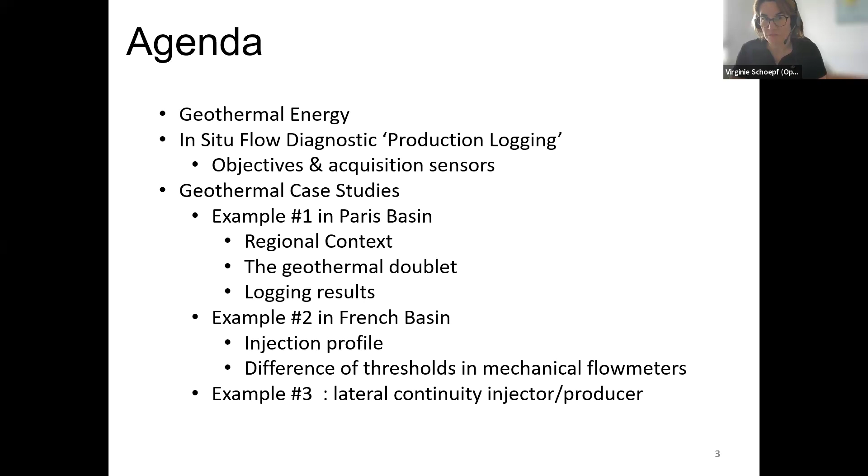So today we're going to start first putting in context this production logging. And I'd like also to present you the instrument we are using before we deep dive into the case study. So there are 3 different places and they are all in France. So let's put this case study in context. They are based on geothermal wells that are deep wells. So there are different types of geothermal energy. There is the shallow one that is limited to 200 or 500 meters. That depends on the local legislation. That's an illustration from EGEC, by the way, the European Geothermal Energy Council.

And then below 500 meters, we go into deep geothermal. And I would say there are 2 types. One that goes to moderate depths, 5-6 kilometers, down to 200 degrees C. That's a geothermal that is mostly used for heating and cooling, and we have examples from this type of geothermy, but there is also very deep geothermal. I think you had already different talks in this special interest group that go deeper. So today, the tools we are going to use are tools that are used in hydrocarbon wells also, but with the common spec of 150 degrees C max and 1034 bars.

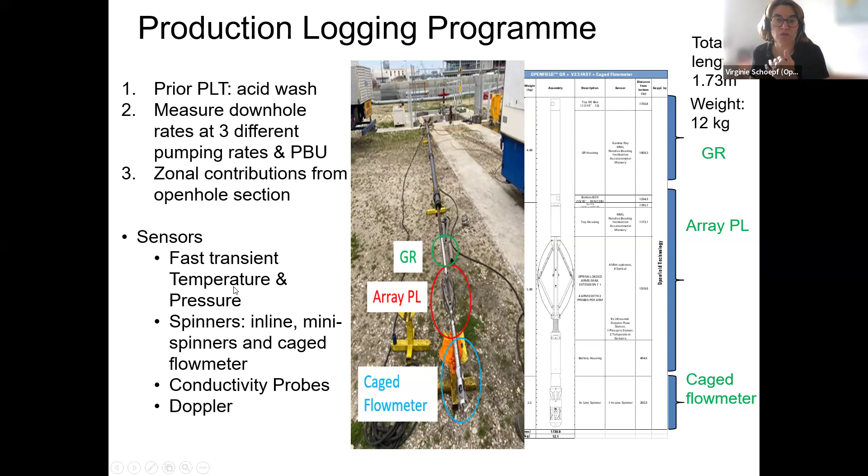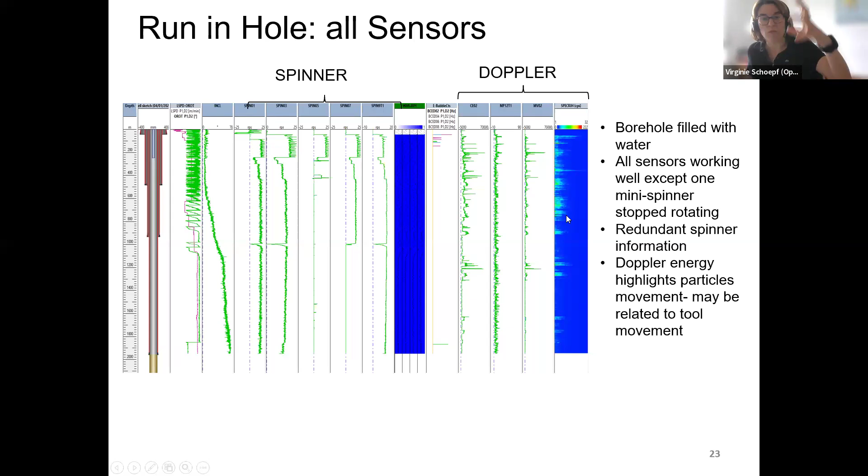Also looking at the run in hole of the conductivity data. So I mentioned that we have a conductivity probe. This probe is not calibrated to salinity compared to some of the ones, I think, that exist in the industry. For us, in Openfield, we were using this probe to really recognize water versus hydrocarbon. But if in low salinity range, we know that this probe is going to be sensitive to salinity.

So what we have here again is the depth, pressure, apparent density, close to 1 gram per cc. And then we have this conductivity probe data here, that's the raw apparent conductivity, that is very low, because we have air just below the wellhead, and then increases, then we are going to water, and we see there is a slope on this curve. And why do we have this slope? Actually, it could be maybe because we have a gradient of salinity, or because temperature is increasing.

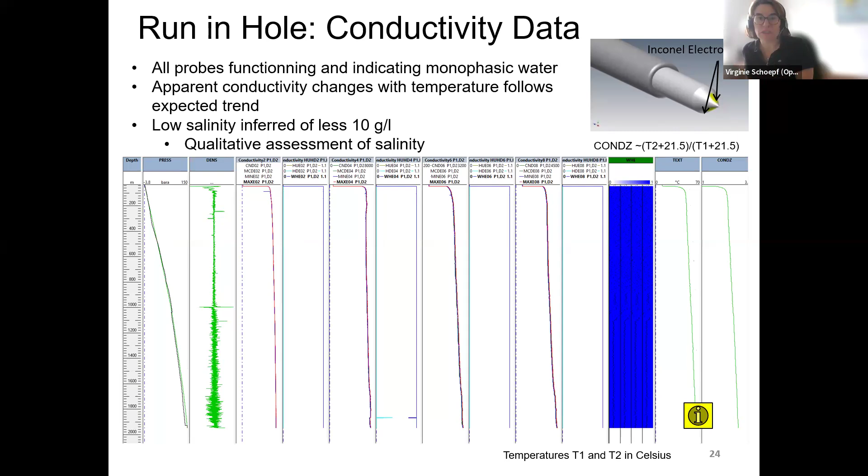So we can check that if we emulate a conductivity increase just based on the temperature, we can see that the response is very much alike the measured response. So we know that there's no gradient of salinity here. It's purely an increase of apparent conductivity because of temperature increase. What we know also from our sensor is that the fact that we can still see an increase, it is not saturated, so we know that the salinity is less than 10 grams per liter. So of course, at surface, the water is produced and analyzed, and that was confirmed.

I mentioned that going up and down, there are generally 3 steps of rates that are done at different rates. So that was acquired. So we acquire pressure, temperature, all the spinner data. And we compare surface metering that was given to us with quite a large inaccuracy, 25%. And based on the data we got from the production logging tool sensors, so mostly propellers, this is inside casing, we are able to get more accurate than the surface metering. So it's more in a plus or minus 5%. So we are in good agreement with surface.

Another thing that they do at this stage, they shut in the well and they record the pressure buildup. Why do we do that? It's in order to understand the reservoir transmissivity, and that's quite key to characterize the subsurface environment.

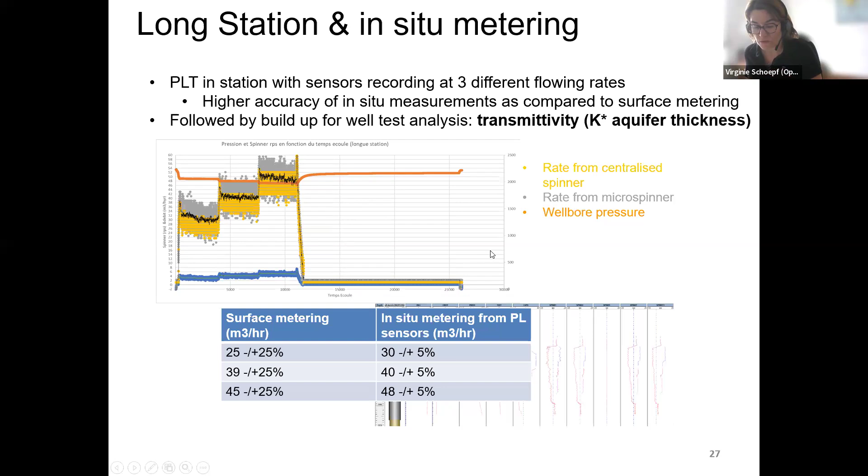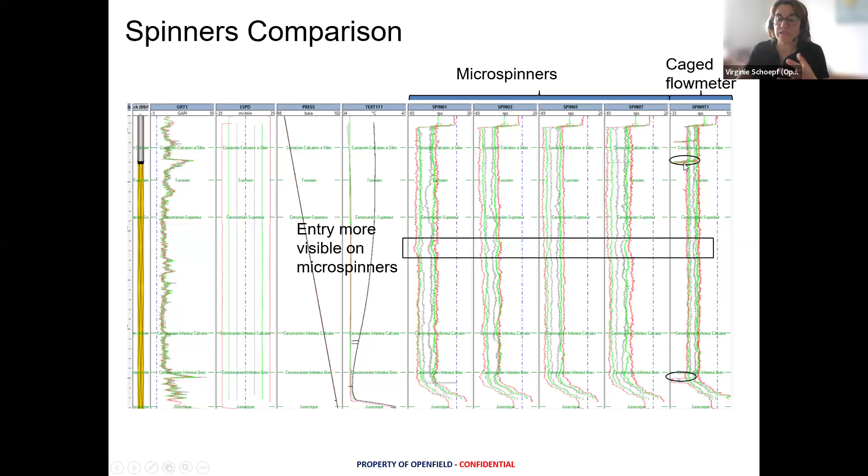Nevertheless, if we compare the mini spinners to the big helix, we can see that there are some inflows inside the limestone. That's the limestone part. That's quite important to have a sensitive flow meter, because it will be able to allocate that, to say that yes, there is some that is going into the limestone. We know that the biggest helix tends to average more; they are more inert than the small helix.

So when we look at that, we see it's quite, I don't know, 300, 400 meters, well, maybe 50 meters of sandstone. That's a vertical well, and we are drilling a lot, with most of the flow going to sandstone. So that can again trigger some questions on whether we should in the future do a deviated, longer part into the sandstone. Well, yes and no. Again, for the limestone, this is a profile just at the start. It may be better, may have more fluid going into the limestone, but there is also the fact that this well managed to get quite the objective in terms of rate.

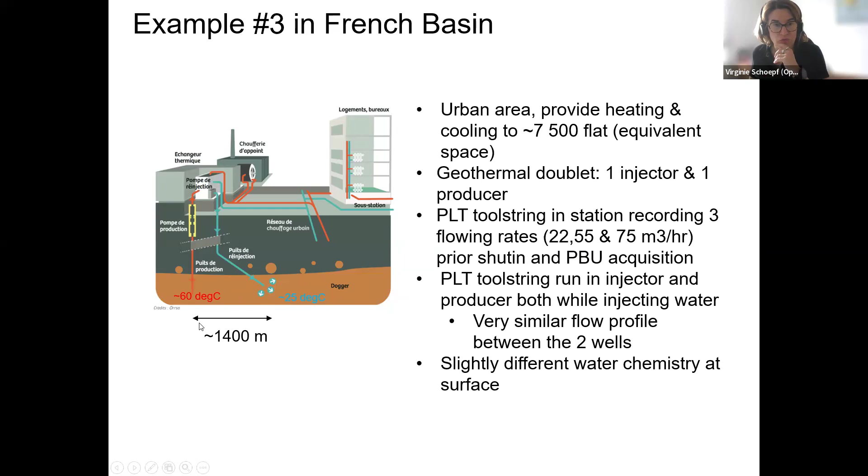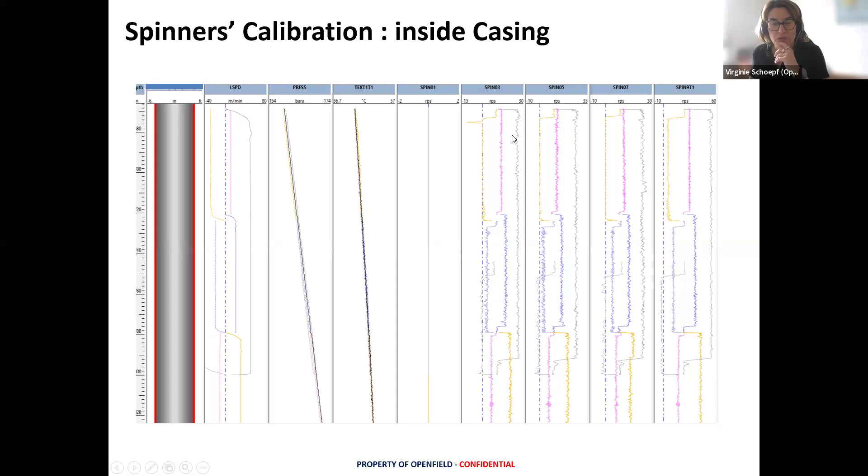First, again, just to show you a bit of spinner calibration. I didn't mention that, but how do we do spinner calibration? We acquire data at different cable speeds. LSPD is cable speed. So you move the tool at different speeds, and then you record the rotation per second of the different spinners. From that, one way is to do a cross plot of RPS, rotation per second, and cable speed, and then you will get a slope if you are in stable condition, and that slope is going to be the conversion of RPS into flow speed. So we can do that for all the spinners. The mini spinners tend to have the same standard slope, and then the inline spinner, remember there is a bigger helix, also gives us a speed.

So what's interesting here, if we look at the type of flow, the flow rate was 75 cubic meters per hour, and inside the casing it's 8.6 inch. What we could see, we had very accurate velocities, good calibration plots, and several mini spinners which repeat a velocity around 30 meters per minute, whereas the spinner at the center, the biggest helix at the center, is reading higher.

So why is that? Well, if you use the flow rate and the ID of the pipe, you can see that you are actually in laminar flow. And in laminar flow, depending on where you are in the cross section, you will get different velocities. So the helix, the inline spinner, is at the center, so it's reading higher velocities than the mini spinners that are just less than 1 inch from the wall.

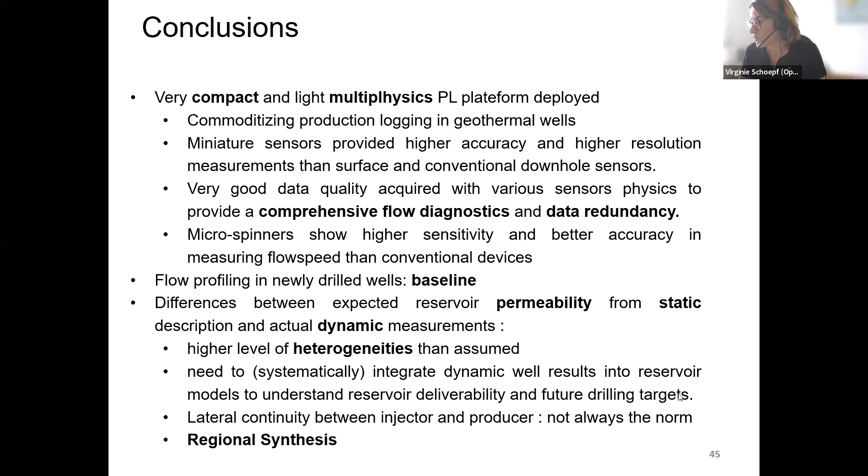So Ivan Virshlo says, is it true that the Rhine Graben geothermal gradient is 100 degrees per kilometer? Basically 200 degrees at 2 kilometers depth. Do you have any insight on that? It's 10 degrees per 100 meters. It's 100 degrees per kilometer. Is that what the question was? Okay. Yeah. But there are some areas with an even slightly higher gradient.

Maybe there are people from Germany or from Alsace in the call, ES, or Lithium de France, that are in the 100 degrees per kilometer, but they are even slightly higher sometimes. Yeah, we do see those, not just in Europe. Earlier we were talking about the projects in the United States, there are some areas where it's easy to find 100 degrees per kilometer.

Tuscany, Hawaii, California, Oregon, Yellowstone, Indonesia. There are lots. That's maybe something to think of for the future. We're going to have to design, as we talked about, tools that can handle super hot environments. That's something for the future.

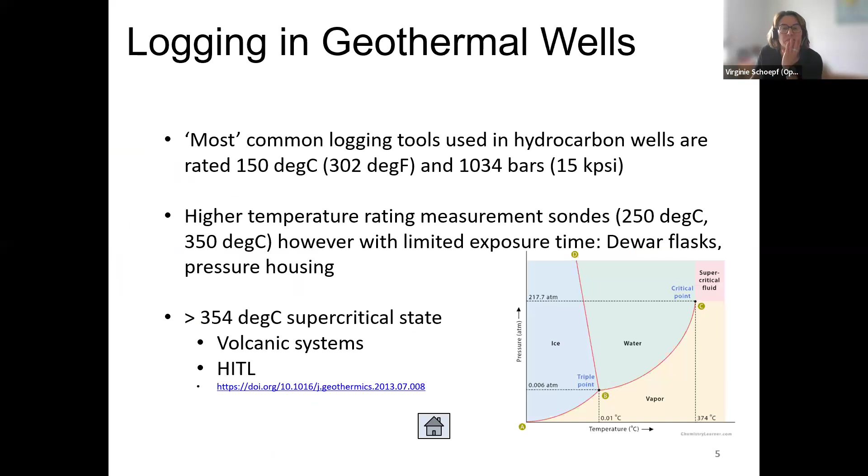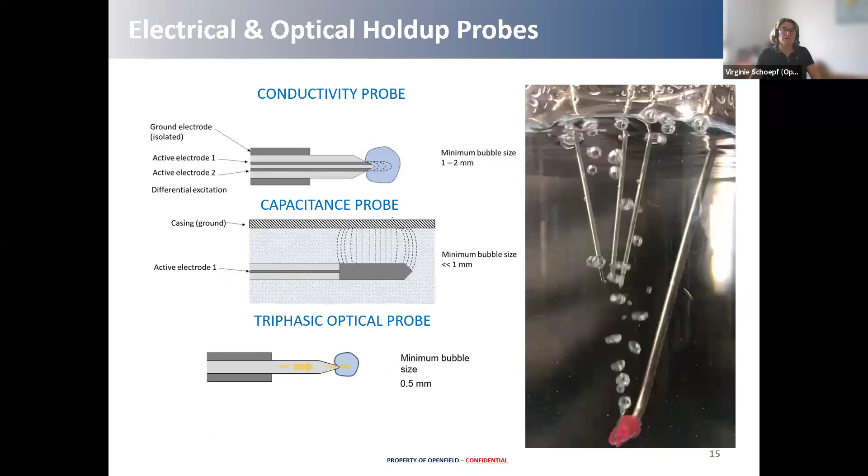Thank you for that. And then we have Mr. Thomas Franzen that says, "Dear Virginie, merci for your comprehensive presentation. May I ask about the first three PLT static stages measured within the casing, while injecting or producing?" Yeah. That's something discussed with people from CFG. All three of them are French examples. This is common practice to do.

So generally, first you do an acid wash because in the Paris Basin you have limestone rocks, and they do three types of flow rates in order to do a well test analysis. They are followed by a PBU, and then a reservoir engineer interprets the PBU as a response to the multi-rate test. So it's to find any boundary that you would not have seen with seismic, because in the Paris Basin they're also using seismic data. You don't want a fault between the producer and the injector.

I didn't do the interpretation of the well test on this case study, but if there are more detailed questions, I'm happy to ask the partners. So he was asking, is it while injecting or producing? I'm assuming while injecting. Yeah, right, while injecting. It can also be while producing, but it depends on the well, actually.

Thanks for that question. Connected to that, how do you designate the flow rates that you will test at? I suppose it's very well specific. And when you said you're looking at the boundaries, is that what later would define the distance in a doublet from injector to producer? Because earlier I saw 1,400 meters. Obviously, you have to look at the subsurface setting, but based on your experience, the decision on the rates and what you get out of the PBU. Yeah, generally the injector and the producer are already drilled more or less at the same time.

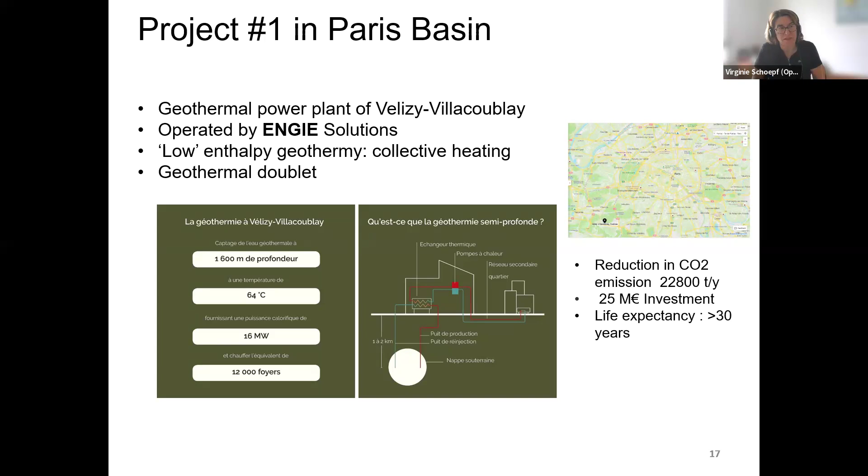Often the target, what I see in the Paris Basin in the technical data that is sent, is that the delivery rate is around 300 to 400 cubic meters per hour in order to make this economical for a town of around 10,000 people, and it has to last 30 years. And then what you want to check with the transmissivity is that you are not going to have a decrease of, I think, 0.5 degrees C at the injector after 30 years, which would be the duration of the plant.

All right, thank you for that. There was a question that came from Carson Val. Can you repeat why the PLT measurement does not work so well in fractured reservoirs?

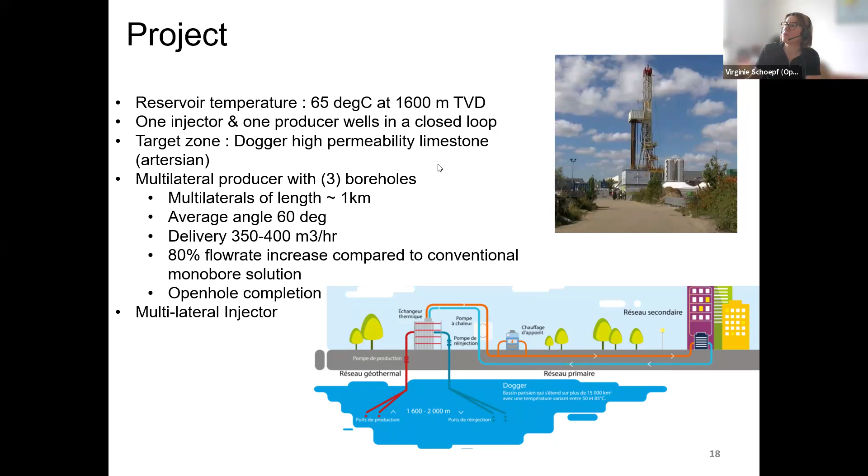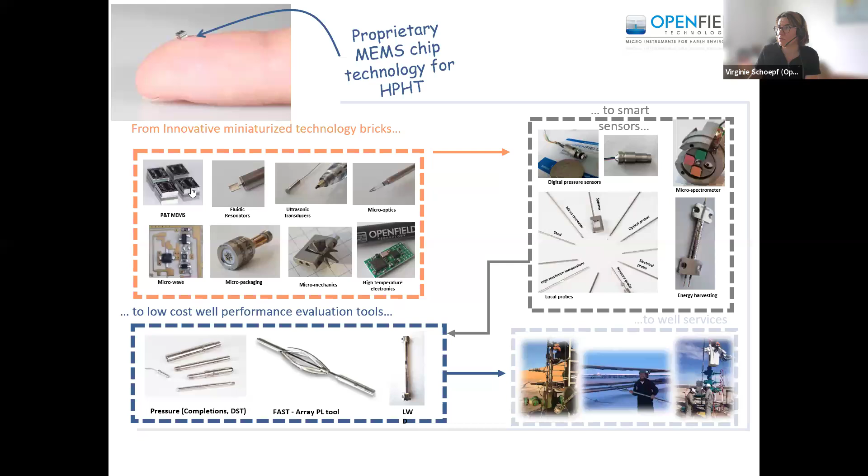No, I wouldn't say that about the PLT. Again, PLT is production logging, and in production logging the best you can do is have all types of sensors, because then you can analyze the data with anything you want. I have heard sometimes people, especially in granite, when the reservoir is dominated by fractures, don't trust the spinners even in open hole, because they say spinners sometimes get blocked. So they don't run spinners and just rely more on temperature. Most vendors have a tool string that contains not only temperature, but you can put a spinner, and they get quite close.

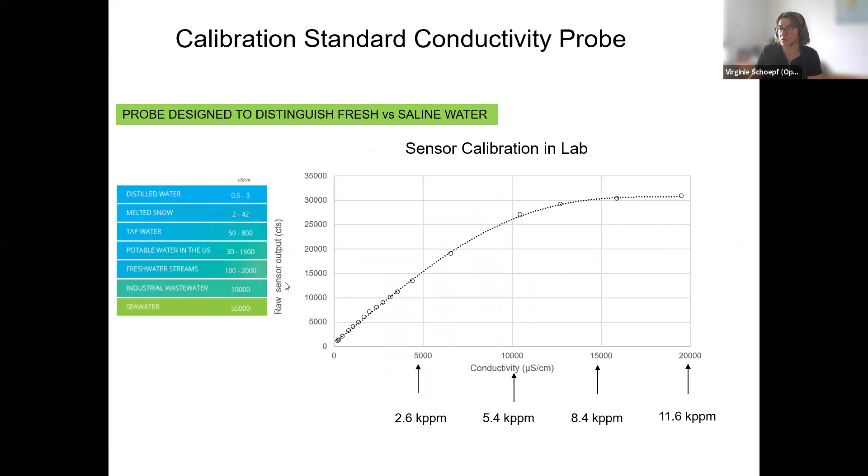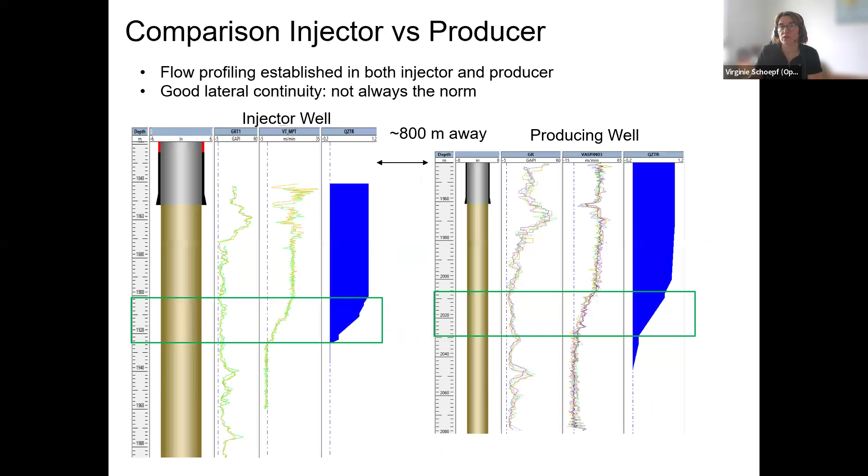So I wouldn't say spinners are bad. Sometimes they don't rotate well, or you have to be careful if you are in a cased and perforated completion or a gravel pack without proppant everywhere. You can have some flow behind the inner string, because the spinners are inside the casing or the inner string. They can only see where they are, whereas the temperature is sensitive to the heat of the rocks across the casing.

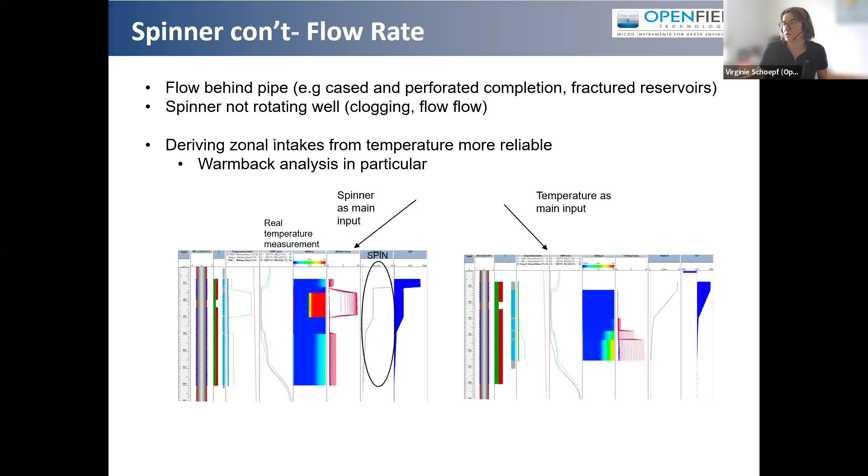And SDP has used our Openfield instrument. So it's really SDP that is on site. And then together with the likes of NG, if they are maître d'œuvre, or CFG, a company like that, or also Antea in France, they will execute or witness the logging program.

And the programs are, I would say, like for oil and gas, they are decided in advance. And there are people like oil and gas, the same organization on shift, because they are drilling and logging 24 hours, 7 days a week. They are in urban areas, so they need to be careful with the noise, but there will be some noise, but they are working around the clock. And it's not because it's geothermal and you are in cities that people are not organized; they are very organized.

And so to answer your question, it's really on the logging part, SDP logging in these cases. But we work or help if they have questions on sensors. But it's a teamwork.

Understood. Thank you. We do have a last question, it's a bit general, from Ravi. Sorry, a colleague reminds me that they were on site, some Openfield at the start to introduce the new tool. So we can go also on site, but the main business is SDP logging. Okay. Thank you. Welcome.

Ravi says he's got a general question. How do we get temperature versus depth data from an open source platform? It's a good question. Are you aware of any open source platform of temperature data for Europe? He's working on his research proposal.

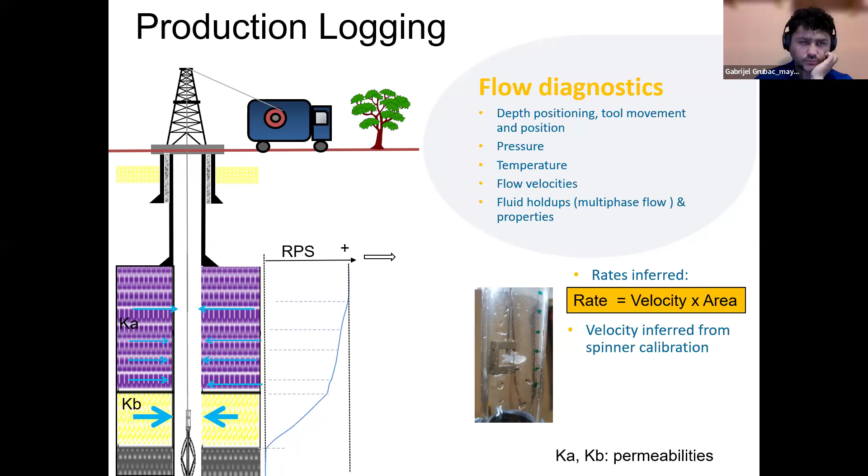Well, there is a GeoBase in France, and there are also ones in the Netherlands, and the Netherlands has a good database, so I'd say it depends. But for the French, there is the Geo database, I think, from the BRGM. I can send the link to the BRGM Geo database. Maybe I can email you, Gabriel, and you can forward it after.

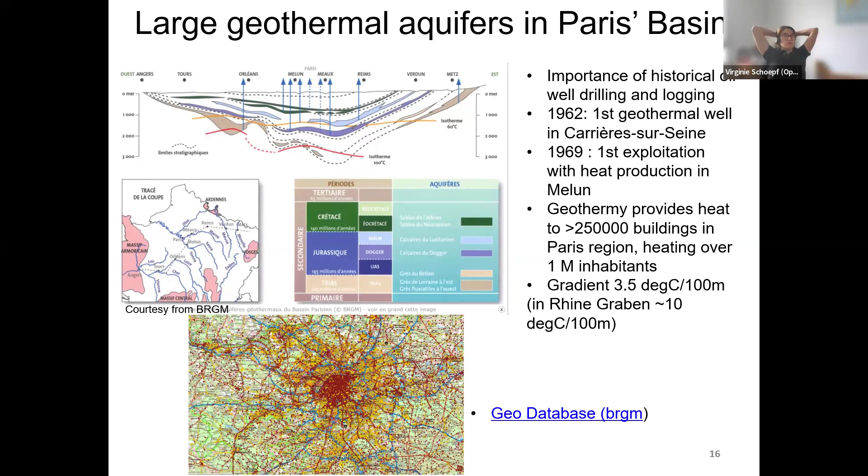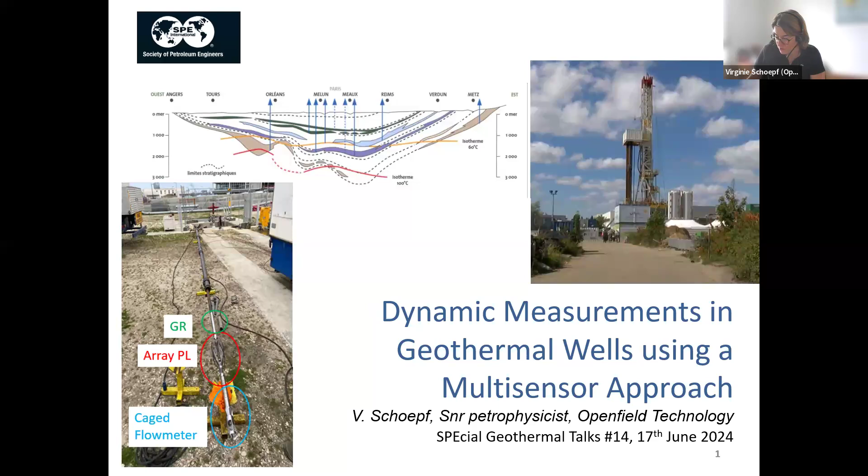We can try. And in the Netherlands, there is also a good database, probably in Germany too, but they tend to be more public to stimulate geothermy. It's, I think, very important. A good question. So if you don't mind including that link, it would be great. I also posted one that's for the US. Stanford just created a thermal model. Oh, Mr. Franson sent us a link. Nice. Thank you very much. I'm gonna save this link too.